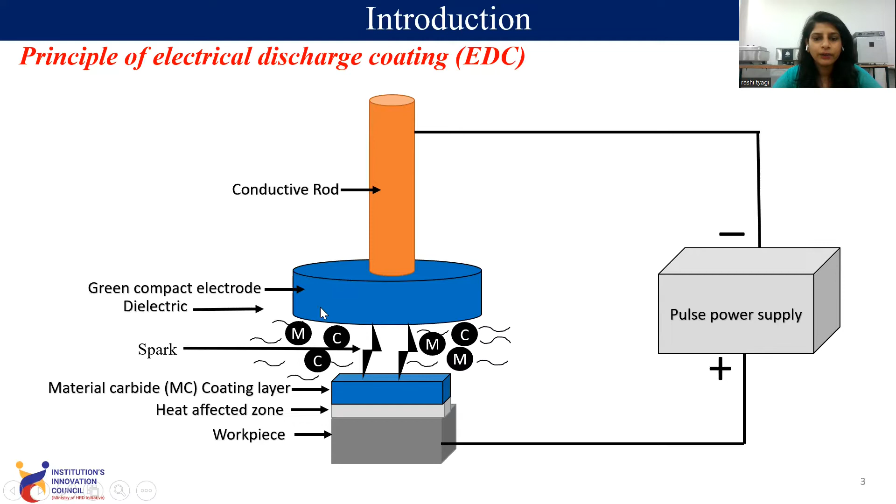This is our process, which we will further discuss in terms of advantages, disadvantages, and how it helps improve the surface characteristics of any workpiece or substrate. EDC is an effective process because just by utilizing powders, you can deposit material, so any area over the workpiece surface can be coated easily, including small surfaces.

Multiple materials, including composite coatings, can be produced in one go, meaning you can use many materials and by making a composite, deposit it on the workpiece surface. Machining and coating can be done simultaneously - if using hard material, you can perform machining and coating together to improve surface characteristics during machining.

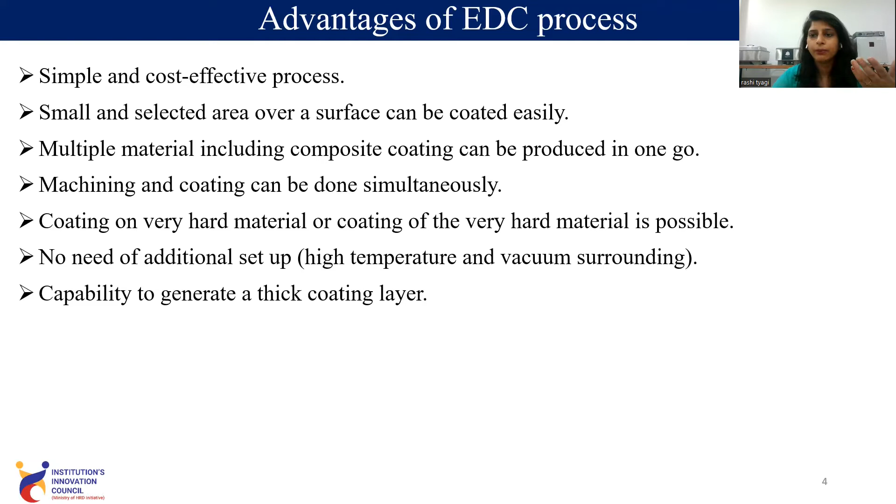Coating of very hard material is possible, meaning any hard material can be used in this setup. Basically, no high temperature vacuum surrounding is required as it is in other processes such as laser cladding. There is also the capability to generate a thick coating layer, up to 2 mm thickness, so even if you want to repair a component, you can deposit a thick coating onto the surface.

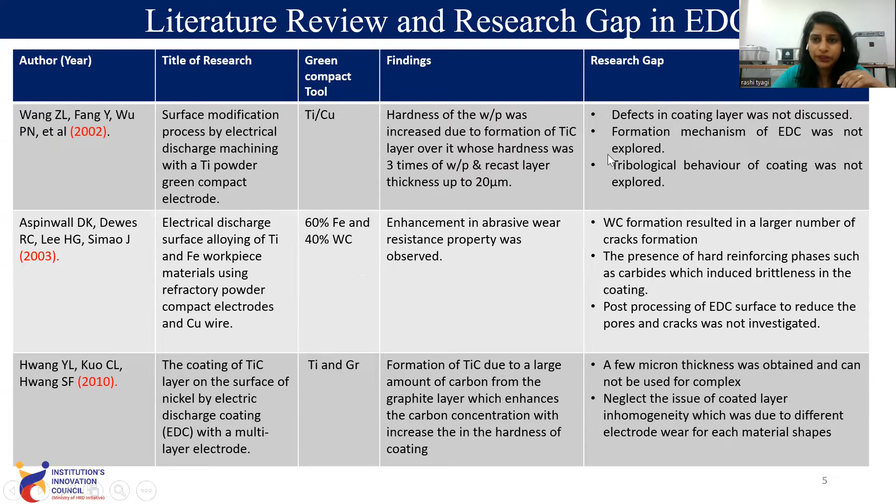Regarding the gap in EDC research: many studies were done on the EDC process from around 2002-2003 through 2010. In all this research, it is found that they used titanium, copper, iron, tungsten carbide, and graphite - depositing hard coatings, but there is no soft coating done by this process. They improved wear resistance and tribological behavior of the workpiece surface using different hard tools.

In this, titanium carbonitride, silicon carbide, copper, and stellite can be used. These are the findings of the research gap analysis, in which we found that cracks and pore formation was there. Also, some of the research does not discuss the wear and friction behavior of the coating.

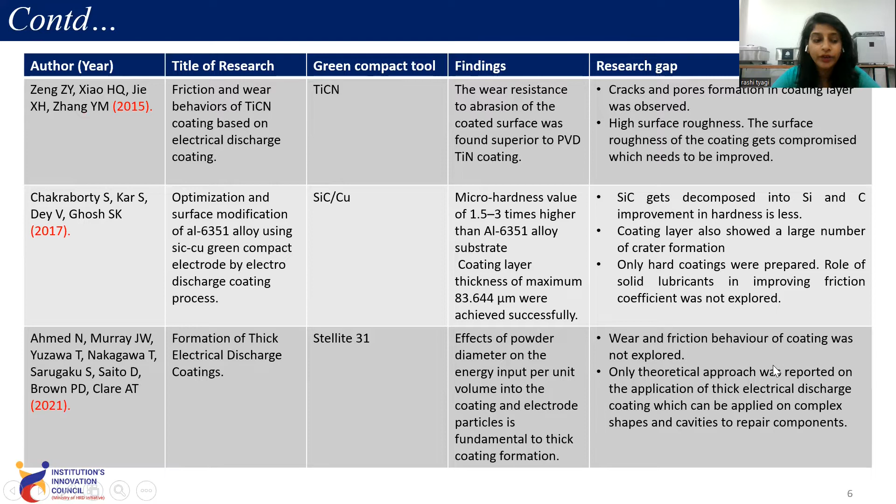So what are our objectives? By identifying the research gap, we found there is no use of soft powder, as I've already discussed. So in this process, we are using solid lubricant coating - solid lubricants WS2, hBN, MoS2, that is molybdenum disulfide, tungsten disulfide, and hexagonal boron nitride. We are using these powders to improve the characteristics of the mild steel surface through the electrical discharge coating process.

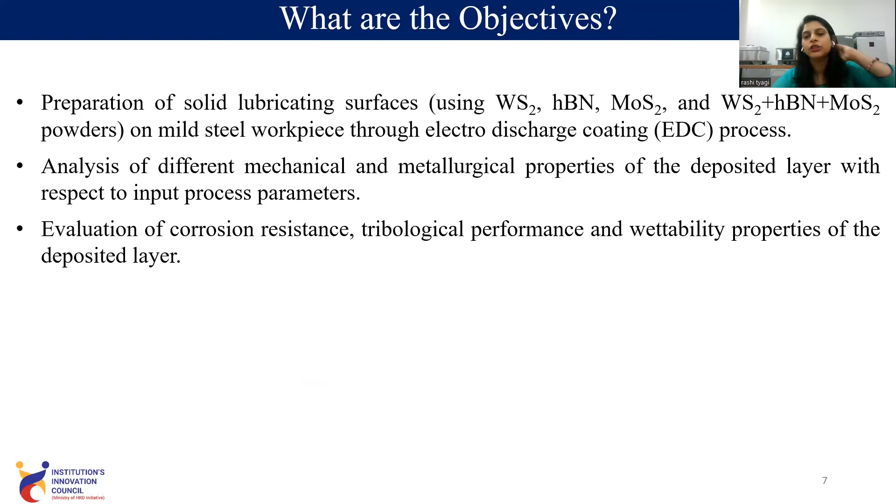We will analyze mechanical and metallurgical properties of the coating, examining different characteristics of the deposit layer with respect to input parameters - meaning the EDM parameters that we are changing. We will also evaluate corrosion resistance, tribological performance, and wettability of the deposit layer, discussing how the EDC process improves these properties.

Lubrication, basically these are the WS2, MoS2, and HBN lubricants, and how they work. They have a lamellar structure, meaning these are layers in laminar form. They have low shear resistance between these layers, so that they can slide over each other.

If they slide over each other, they provide low coefficient of friction against other surfaces, as you can see there is a large area in this figure. So there will be low shear stress, because shear stress is equal to force per unit area. So if area is large, because these lamellae align themselves in the direction of motion, area becomes large, then shear stress becomes small.

So there is low shear stress, so that they can provide low friction coefficient. These are the structures of WS2, MoS2, HBN that we have shown, that they have the lamellar, hexagonal structure. This structure helps in improving the tribological properties, or you can say coefficient of friction or wear properties.

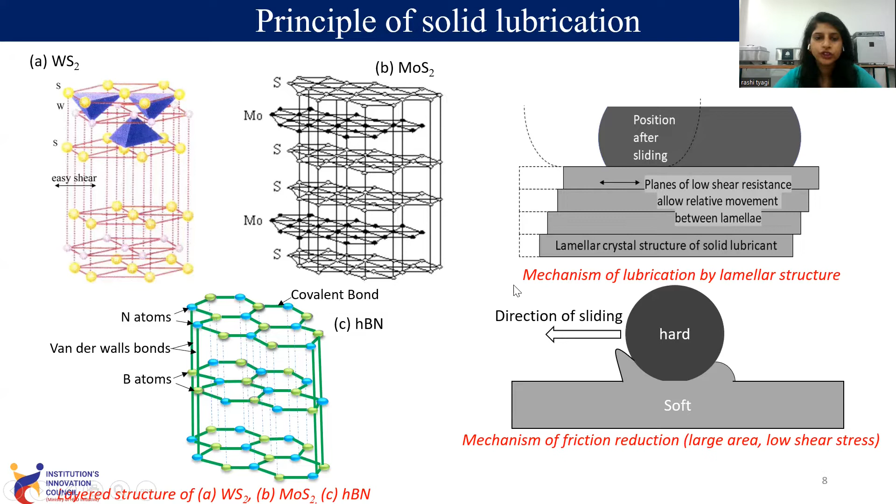Initially we have fabricated the green compact tool, then we have performed the electrical discharge coating, then we have analyzed the quality of coating. Basically, the tool is fabricated by using different powders.

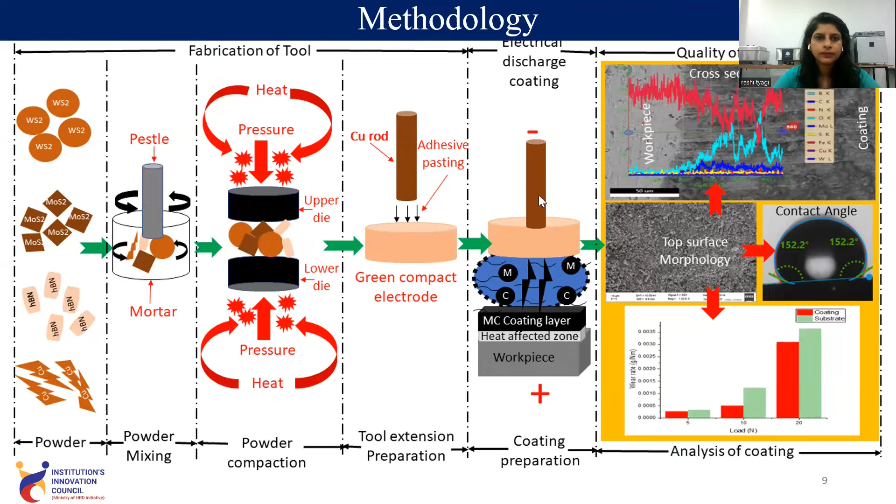Of the green compact tool, how we have prepared it. These are some constant input parameters that we are using, that is solid lubricant, powder material constant. We are using WS2, MoS2, HBN, copper powder. This is the average powder particle size that we are using.

This is the sintering temperature applied in the hot mounting press. Basically, these are the hot mounting press parameters in which we are making the green compact tool. This is the pressure, 200 kg per centimeter square. Heating time 10 minutes, cooling time 5 minutes. These are the variable input parameters, that is we are changing the powder mixing ratio in different ratios.

First of all, we are using all together copper, WS2, MoS2, HBN, and in other green compacts we are using different combinations. It means we are taking copper-WS2, copper-MoS2, copper-HBN in these mixing ratios. By using these mixing ratios, we have prepared the green compact tool.

Basically, this is a solid lubricant. This is the HBN powder that we are using. This is the copper powder, an example of a solid lubricant. This is the binder. So when we are mixing it, we are making the green compact tool of this size, and then we are making the tool electrode extension that we have already discussed in methodology.

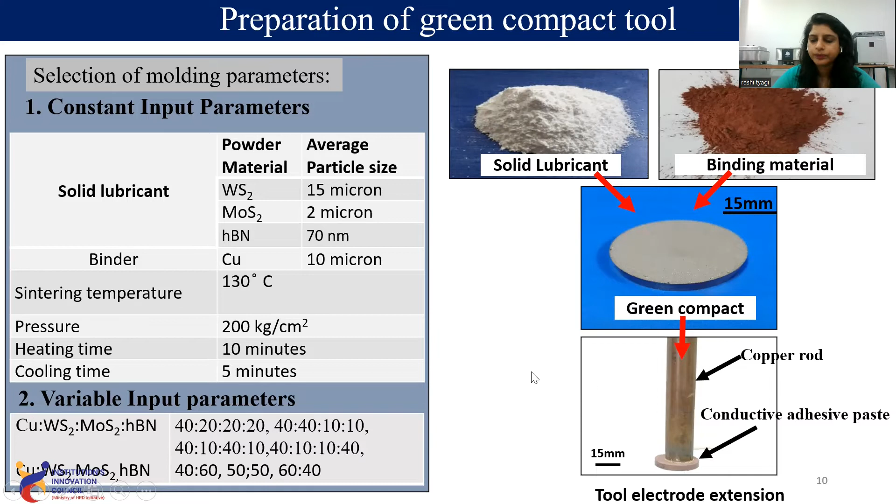The experimentation is performed as we have discussed in EDM. These are the constant input parameters that we are using. The workpiece material is mild steel. These are the dimensions, machining time 4 minutes, polarity negative or positive. Basically these parameters, 4 minutes, 29 microseconds.

This is pulse on time, the time for which current is allowed to flow through the electrode, which is 29 microseconds, and gap voltage is 40 volts, and peak current is varied from 4 ampere to 10 ampere. Duty factor is 30 to 90%. These parameters are decided by performing trial experiments that we have conducted.

The arrangement of the setup that we are using: the green compact tool is held in this tool holder, and this is the magnetic base which is attached to the clamping vise. The clamping vise is where we have attached the workpiece surface. So this is the setup that we are utilizing.

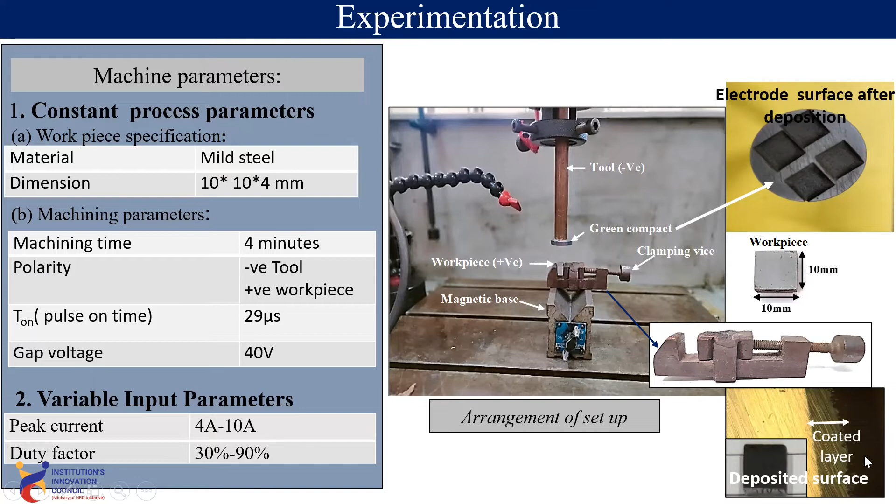After the coating, it is observed that there are holes in the electrode surface after deposition, and there is a deposited layer that we have obtained.

So the electrode surface after experiment, we have decided the trial experiment we have performed. Below 4 ampere current, it is observed that there is no deposition. It means the tool material doesn't get melted and doesn't get deposited on the workpiece surface. So below 4 ampere, we have not performed the experiment.

So this is the copper HBN ratio. Above 10 ampere current, the tool gets melted. Then you can see at high coating time that we are using 4 minutes above high coating time. So we did not perform the electrical discharge coating because the tool gets eroded totally.

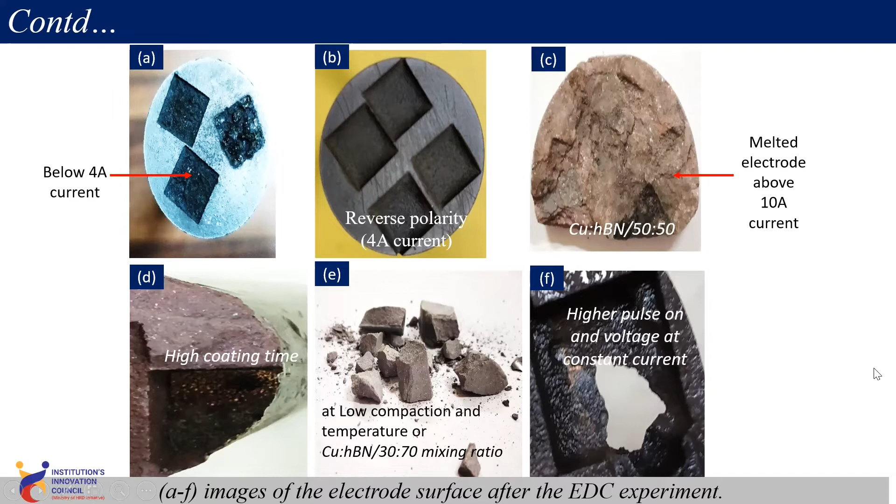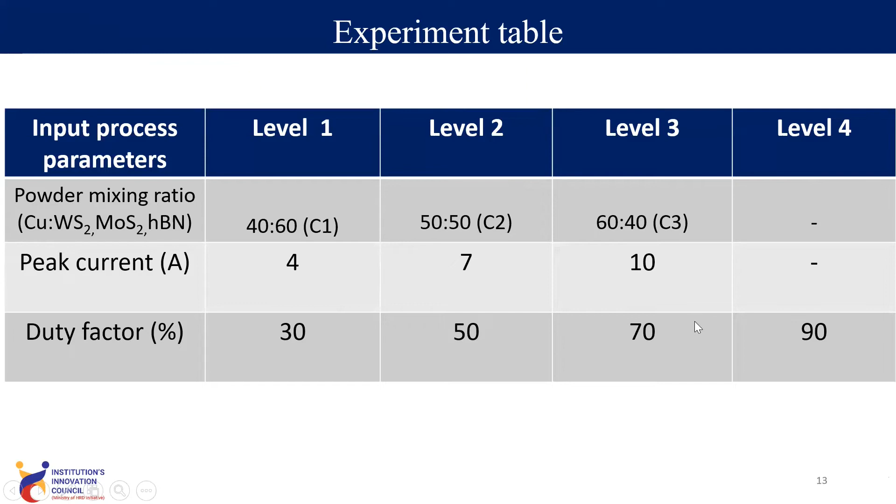Experimental table in which these are the powder mixing ratios that are varied, peak current 4 ampere to 10 ampere, duty factor 30%, 50%, 70%, and 90%.

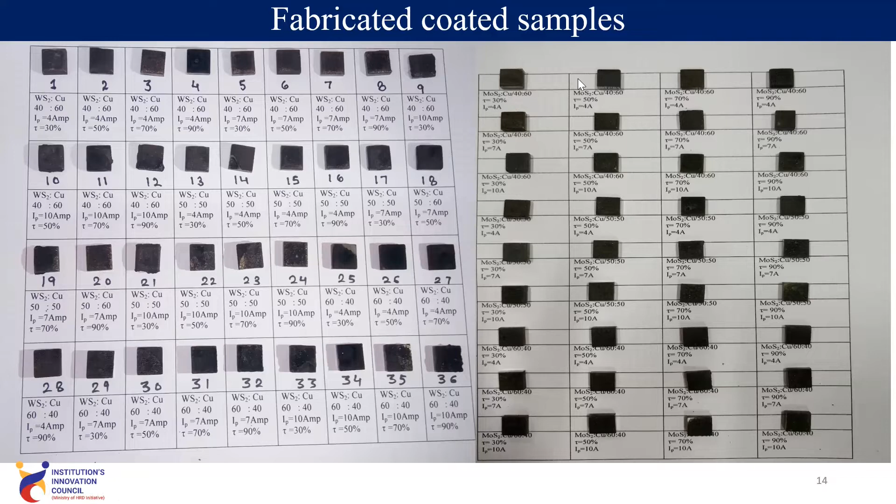These are the fabricated coated sample images. As you can see, these are 36 experiments performed using copper WS2 tool and copper MoS2 tool. 36 experiments that we have performed, as I have shown, these are the surfaces after the coating.

Result and discussion. Initially, we will discuss the investigation on coated surface characteristics. Here is the cross-section morphology of coating at different peak current.

As you can see, this is for MoS2 plus copper coating. This is for WS2 plus copper coating. And this is for HBN plus copper coating. So we have observed the result at different peak current.

Similarly, in the MoS2 and HBN coating. Why? Because when we increase current, a large amount of heat goes into the tool surface, and more of the tool gets melted, and more metal gets deposited over the workpiece surface. So we have higher thickness at high current.

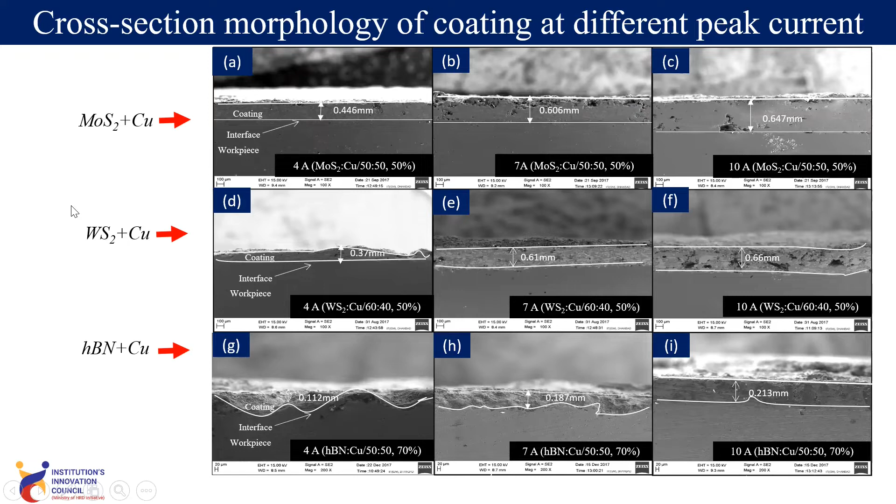This is the surface morphology of coating at different mixing ratios. It is observed that when we change the mixing ratio, there is a change in morphology. It is observed that when we use a high amount of MoS2 and low amount of copper, basically copper works as a binder.

Copper works as a binder. So if we change the percentage of copper, or use a low amount of copper, there is an issue since MoS2 is basically an insulating material. So if we use a low amount of copper and high amount of MoS2, the electrode becomes insulating, less conductive. So it becomes difficult to deposit metal on the workpiece surface, and non-uniform deposition was observed.

Although when we use MoS2 copper 50 to 50, a good amount of deposition can be observed, although some pores are there. Similarly, we can observe WS2 copper coating, in which we observe very little pores at 60 to 40 coating. We observe a large amount of electrode erosion at this mixing ratio, and large amount of deposition takes place at this mixing ratio.

So these are for HBN plus copper coating, in which at HBN 50 to 50 we observe a good surface.

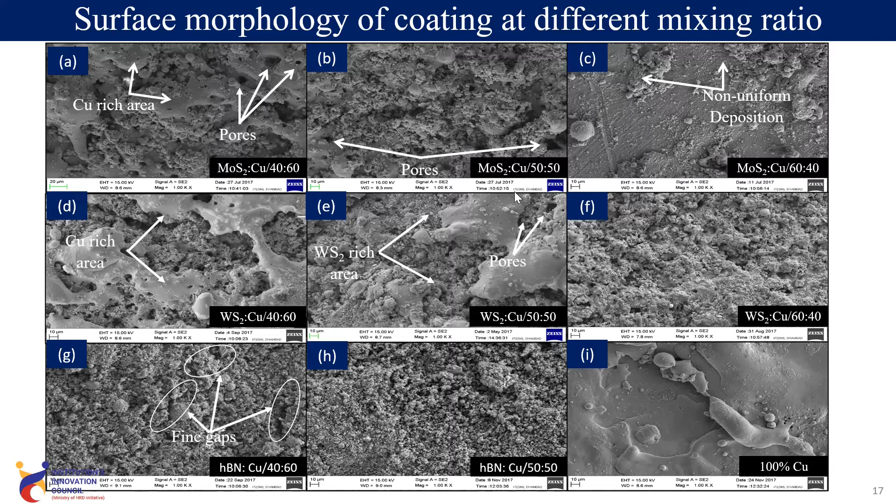Morphology of the solid lubricant coating at different duty factor. Basically, duty factor determines the efficiency of coating.

We observe that when increasing the duty factor up to 50% for MoS2 copper coating, a good surface is obtained. Although when increasing the duty factor to 90%, only arcing is obtained.

This is because duty factor is the pulse on time divided by total cycle time. So when we increase the pulse on time, a large amount of current goes through the electrode.

More material gets eroded from the tool surface, but it accumulates in large amount in the spark gap, so it does not flow with the dielectric.

So arcing takes place, meaning the same spark is generated at the same location, because there is a large amount of material between the spark gap.

So it is observed that at 50% duty factor, a good surface is obtained. When increasing the duty factor from 70% to 90%, mainly arcing is observed, so void formation and big pores and some defects are seen. Similar results are obtained for WS2 copper coating, and for hBN copper coating at 70% we obtained a good surface.

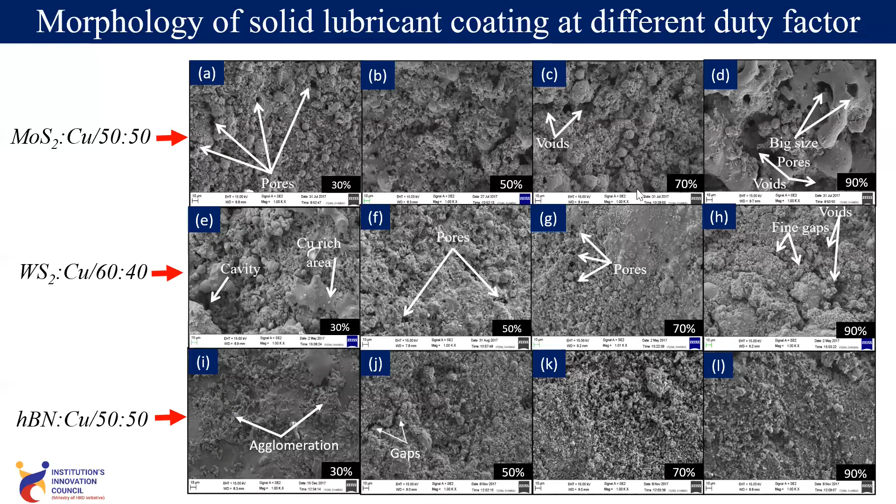The micro hardness was measured using the Vickers micro hardness machine. There is the micro hardness that we have obtained for different coatings. You can see there is very low hardness obtained using the solid lubricant powder.

For the parent material, which was mild steel, we observed hardness was 180 HV at 0.2 kg load. But for solid lubricant coatings, you can observe lower hardness below 180, such as 80, 60, 80, 65, 67. These different hardness values we obtained are due to the solid lubricant powder.

Basically, the solid lubricant is a soft powder that results in low hardness. These are the soft lubricants, MoS2, HBN, that we are using. So hardness becomes low. This also proves that there is a solid lubricant deposition on the workpiece surface, which can improve the tribological properties. These are the micro hardness values at different duty factors.

The micro hardness at different duty factors is shown in different colors. At different duty factors, you observe there is low hardness obtained by increasing the duty factor from 30% to 50%. A similar result is observed for copper WS2 coating and copper HBN coating. By increasing the duty factor above 50%, to 70% and 90%, the hardness changes.

Why? Because at 50% duty factor, as we have already discussed, there is a large amount of deposition. So the hardness becomes low at 50% duty factor.

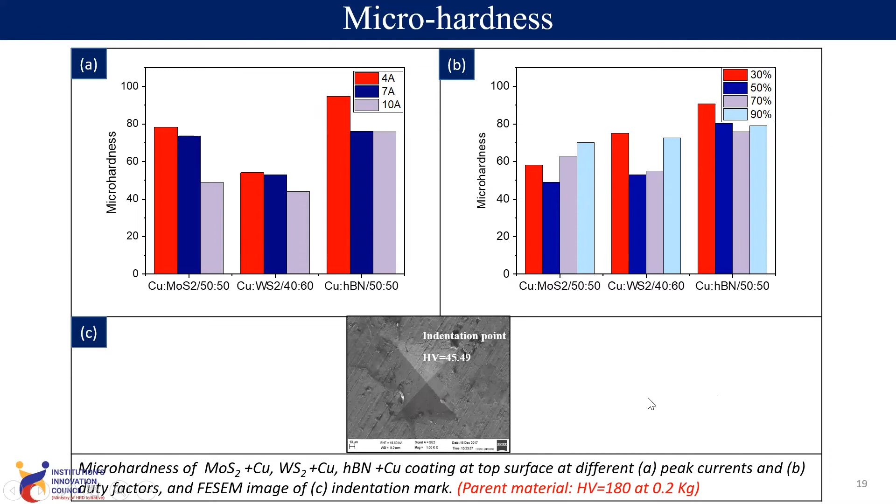Let's discuss the chemical and corrosion resistance analysis we performed. We performed EPMA mapping, which is used to denote the spatial distribution of the coating elements, that is Mo, copper, sulfur. These images E, F, G are for WS2 copper.

Images I, J, K, L are for hBN copper. In these images, we observed a uniform deposition of the metal on the workpiece surface.

The dark orange part shows Mo, copper, and sulfur. Similarly, dark orange parts show tungsten, copper, sulfur, and boron, copper, and nitrogen. So we can say there is a uniform deposition of the tool material on the workpiece surface.

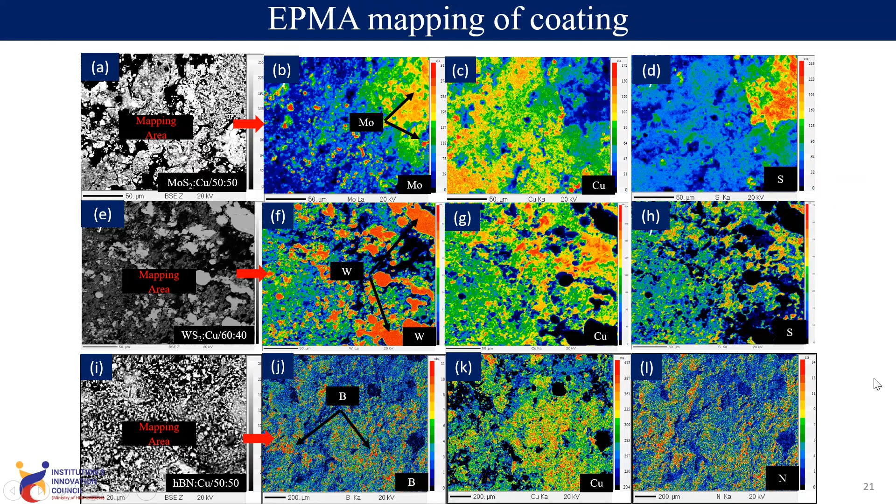Then we have the chemical state analysis. This shows that there is a total amount of deposition of MoS2 particles, meaning the MoS2 element does not break into molybdenum oxide or sulfur oxide.

This can be proved by chemical state analysis, because in laser cladding process or other processes, it is observed that Mo and sulfur get disintegrated and form oxides and other compounds.

But in the EDC process, MoS2, HBN, and WS2 do not disintegrate because we are using low pressure, so they do not disintegrate, but the total amount gets deposited on the workpiece surface. This can be proved by these images obtained from XPS analysis.

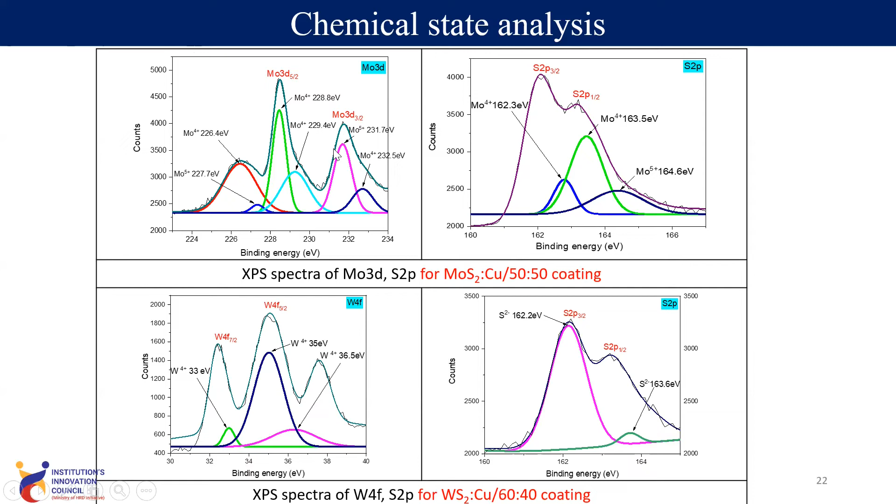By this and previous studies, we have proved that there is total deposition of MoS2, WS2, and HBN.

Corrosion rate measurement was performed. This is the corrosion rate formula that we used to perform the corrosion resistance analysis.

This is the setup we used: a spindle attached to the coated sample, then NaCl solution, with 1 centimeter square area, performed over 140 hours, and density calculated using the Archimedes principle.

The stand we are using is a spindle. First, we conducted the corrosion resistance analysis at stagnant solution condition, then using a motor, analysis was performed at flowing water condition.

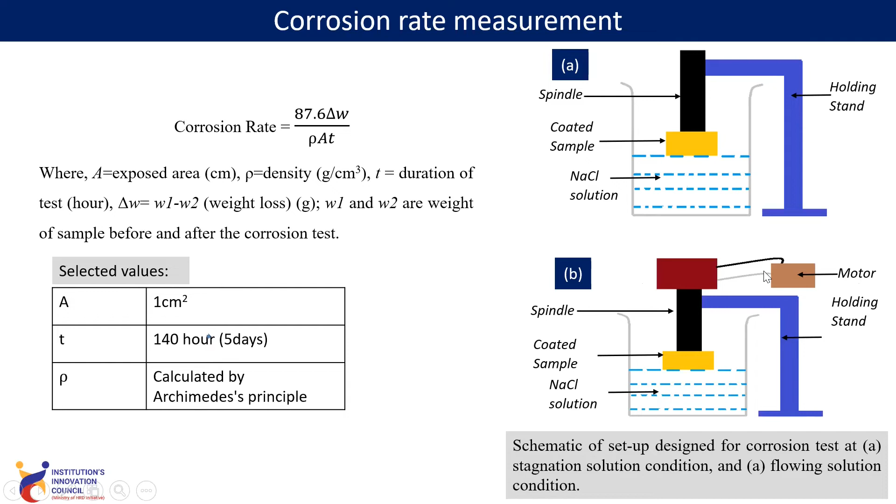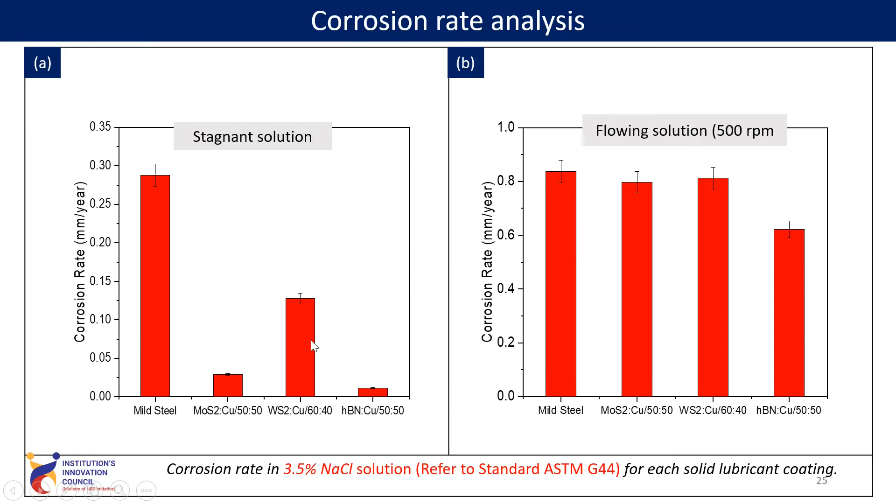We obtained a stagnant flowing water solution in different coatings. The minimum corrosion rate is observed at HBN copper coating, at stagnant and flowing conditions both. All these coatings showed less corrosion as compared to mild steel.

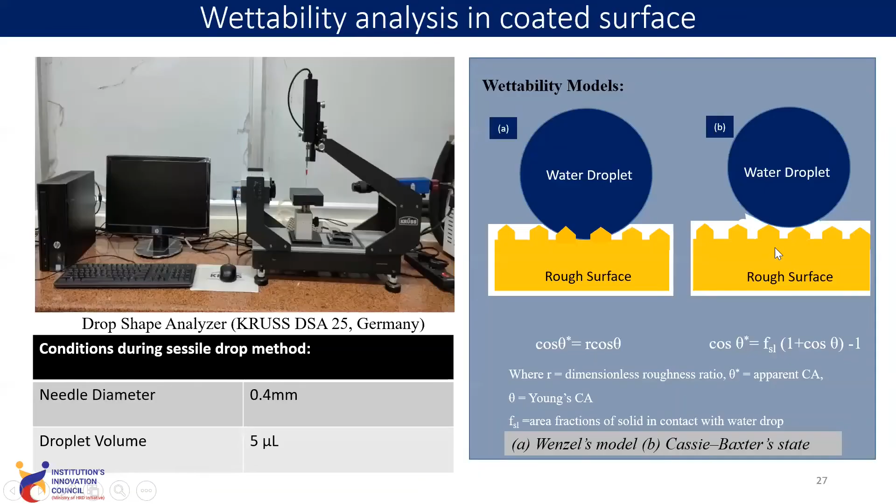This is according to the Cassie-Baxter model, which states that if there is a large amount of porosity, the water droplet will rest at the top of the surface and wet it. If it wets the surface, it will go through the rough surface. But here there is a nodular protrusion on the rough surface, and this protrusion results in repelling the water, giving a large contact angle.

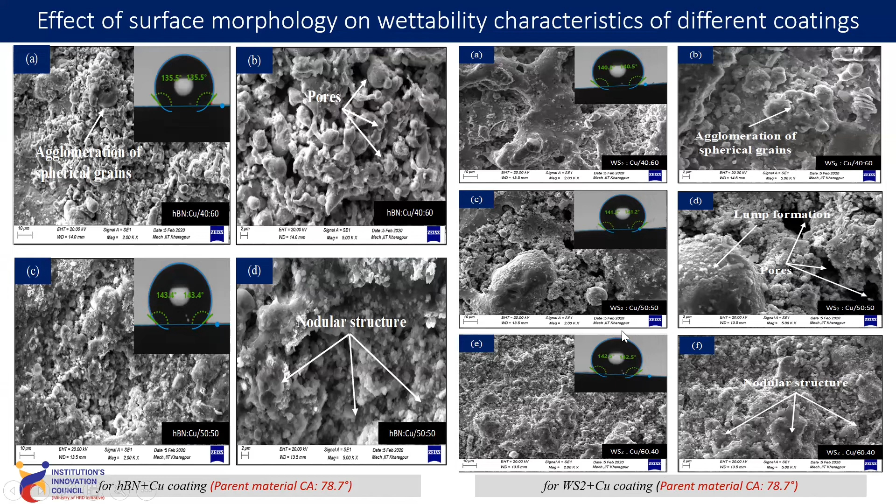The parent material, mild steel, shows a contact angle of 78.7 degrees. But for the MoS2 copper coating, we obtained a large contact angle, with similar results observed. Although there is a large amount of lump formation and big pore formation, this results in repelling water and a maximum contact angle of 165.6 degrees.

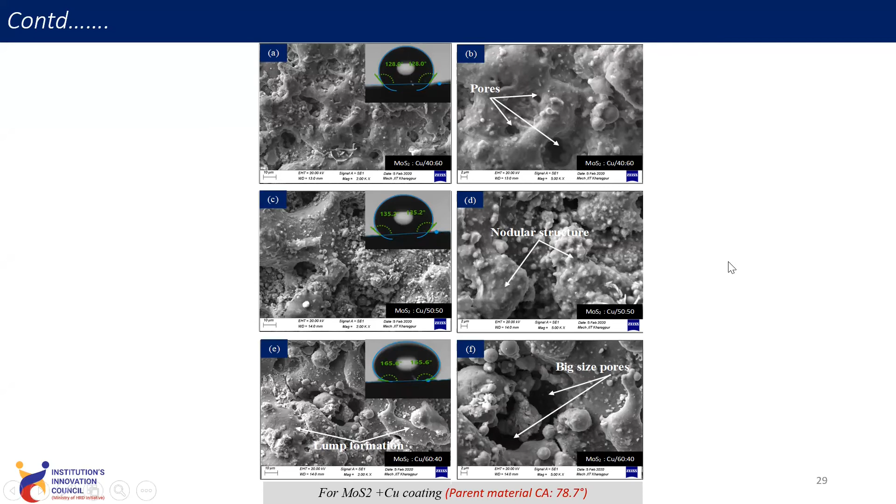Energy calculation: surface free energy defines the excess energy that a surface has as compared to the bulk. Surface free energy determines biomedical properties, self-cleaning property, and wettability of tribological properties. If the liquid is repelled by the surface, then surface free energy will be low, meaning it will provide better cleaning in biomedical components or wettability for tribological properties.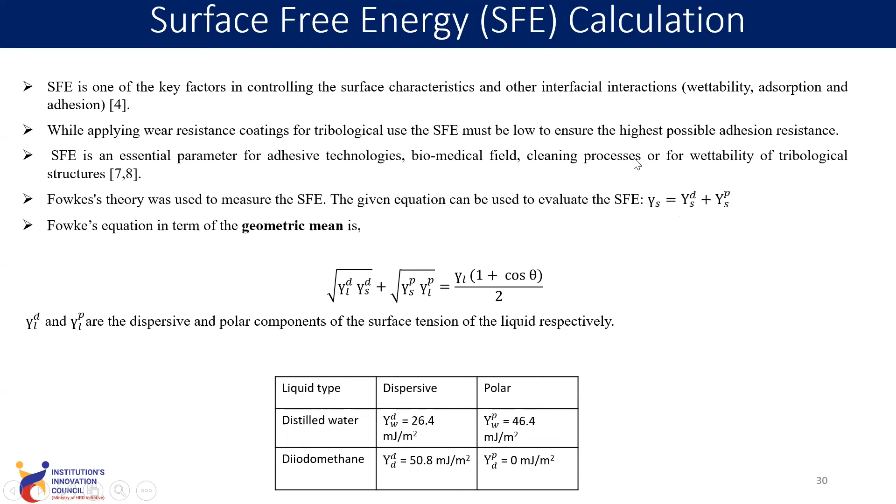Taking the total surface energy, it is observed that among the coatings, the minimum energy is obtained for the WS2 copper coating at the 60:40 mixing ratio, which corresponds to coating A3 with the 60:40 mixing ratio for WS2 copper coating.

This shows the minimum amount of surface free energy, meaning it can show good self-cleaning and tribological properties since it has the lowest surface free energy among all coatings. We also observed total surface free energy over time, where as time increases, surface free energy increases because the surface loses its water-repelling property, and the water droplet will then absorb.

This is the surface energy for the parent material. All these coated surfaces have low surface free energy, below 43.92, as compared to the parent material.

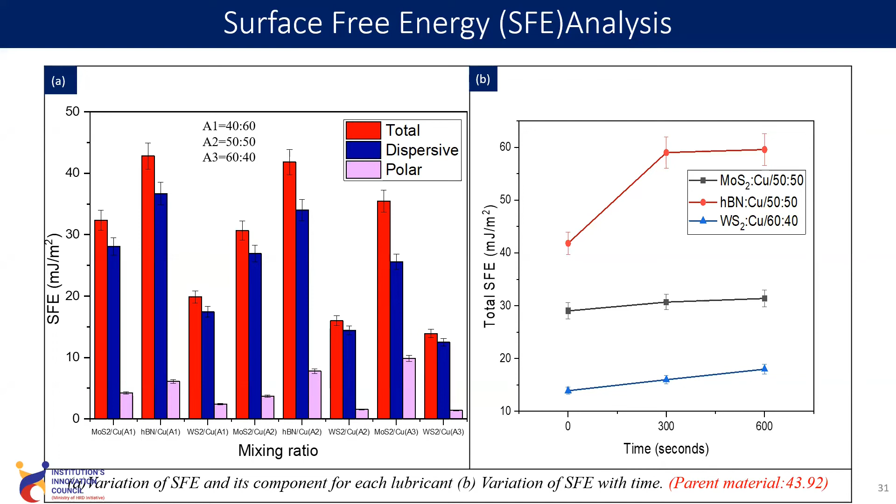Wear and friction behavior of the coating, along with the parameters we are using. This is the setup that we are using, the pin on disc test setup.

The formula for specific wear rate involves calculating the weight loss or mass loss, the sliding distance of the wear track, and the load, from which we obtain the wear resistance.

This is the prepared pin, and this is the coated sample attached to the pin. This is the chemical configuration of the EN31 steel disc, which serves as the counter disc as shown in the figure. This is the material component, the EN31 steel disc, along with the coated sample that we are using.

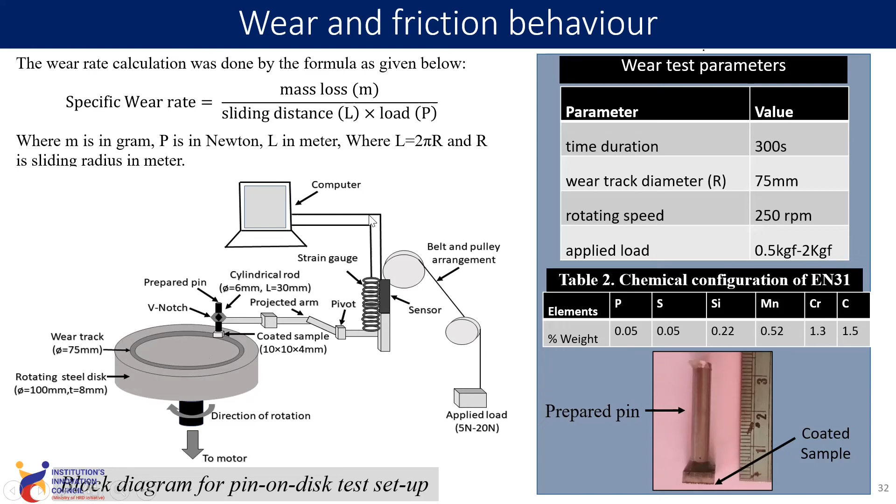By capturing the data on the computer, we obtained the coefficient of friction and wear in different coatings. We observe that all the samples showed a low specific wear rate and low coefficient of friction compared to mild steel. This is the coefficient of friction for the mild steel surface; all other samples showed lower coefficient of friction than mild steel. We have also shown that these all have a low amount of surface free energy, so they show good tribological properties.

Similarly, for WS2 copper coating, we observe a minimum wear rate, the lowest among all coatings, because this coating also shows low surface energy. So we have established the relation between surface energy and wear rate. This figure shows that the mild steel surface has larger surface energy, while all the coated surfaces have low energy.

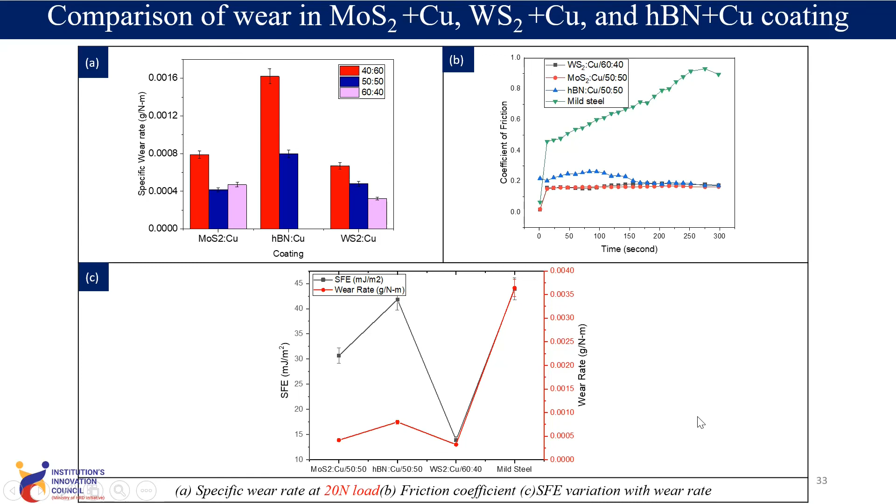This is the comparison of wear mechanism. As you can see, this is the mild steel surface, this is the MOS2 copper surface, the WS2 copper surface, and the HBN copper coating. In this, it is observed that abrasive grooves are formed, and for the minimum wear case, minimal abrasive sliding direction marks can be seen. This surface showed the highest wear resistance.

This is the surface captured after the tribological test. We can see deep grooves in HBN copper coating, and also deep grooves in the sliding direction for MoS2 copper coating, but a low amount of deep grooves for WS2 copper coating. This also proves that WS2 copper coating has the lowest wear rate.

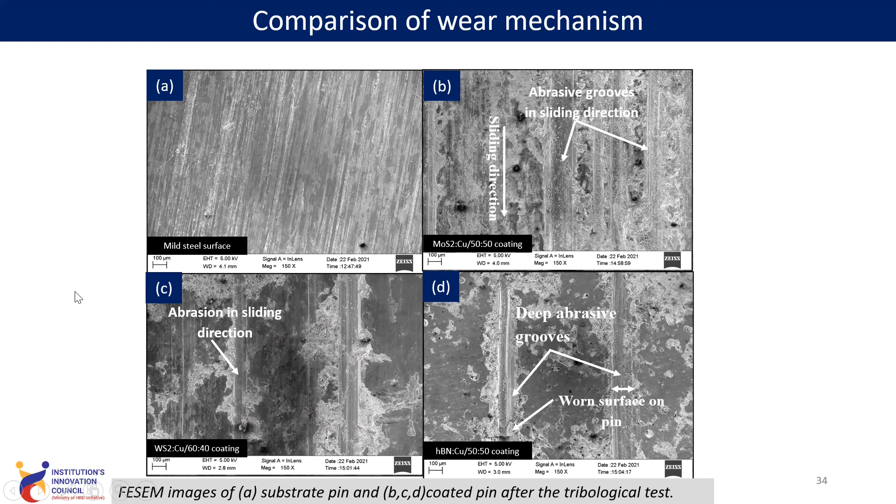Conclusion: pure solid lubricant coating was not possible as the powders are non-conductive and very dry. So copper was mixed as a binder. Basically, solid lubricant coating alone was not possible because these solid lubricant powders are non-conductive, so copper was mixed as a binder to make the green compact tool conductive.

The morphology of the coating can be varied in the EDC process with proper control of the input process parameters. As we have seen, at large peak current, large coating thickness was obtained. So we can control the coating characteristics by controlling the process parameters, which also determines the porosity in the coating, because large tool erosion results in large deposition, and large tool erosion is possible at high current.

Maximum roughness was obtained with MoS2 copper coating, as we have seen a large amount of nodular protrusion in MoS2 copper coating, resulting in a large contact angle of 165 degrees.

All the coatings showed a low degree of wear compared to the base material, but as we have already observed, wear rate was lowest in WS2 copper coating, which also showed the lowest surface energy at this mixing ratio.

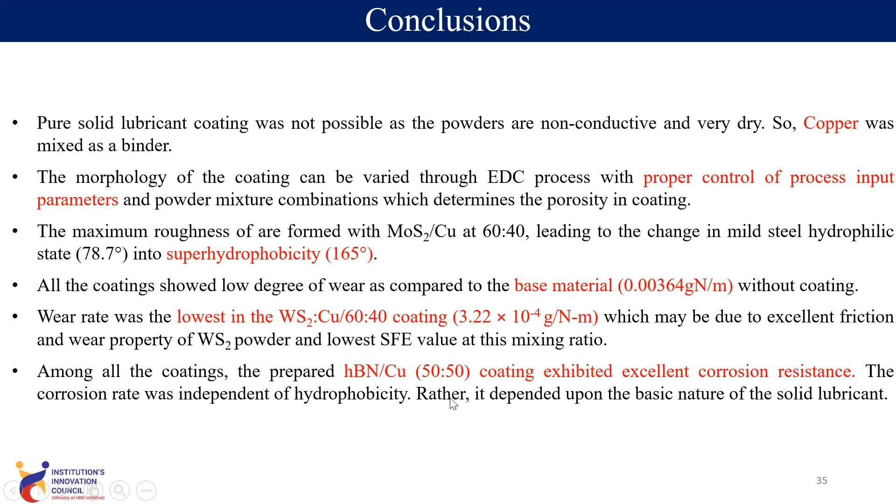Among all the prepared coatings, the HBN copper coating has shown excellent corrosion resistance because it has a proper corrosion resistant property. HBN's corrosion resistant property results in greater corrosion resistance compared to WS2 copper and MoS2 copper materials, because corrosion resistance depends on the basic nature of the solid lubricant.

The future scope of the work includes post-processing of the EDC layer to reduce surface roughness. Basically, the EDC process produces large surface roughness which cannot be used in some industrial components, so post-processing is required. This can be done by performing the EDC process again on the obtained surface.

Then, application of EDC over complex shapes. Basically, as we can change the shape of the green compact tool, if we use a complex shape tool, it is possible to coat complex shaped workpieces.

And study of the EDC process with a green compact tool through development of a numerical model. Basically, there is no numerical model developed yet to observe the heat transfer effect and current effect. These things can be done in the future.

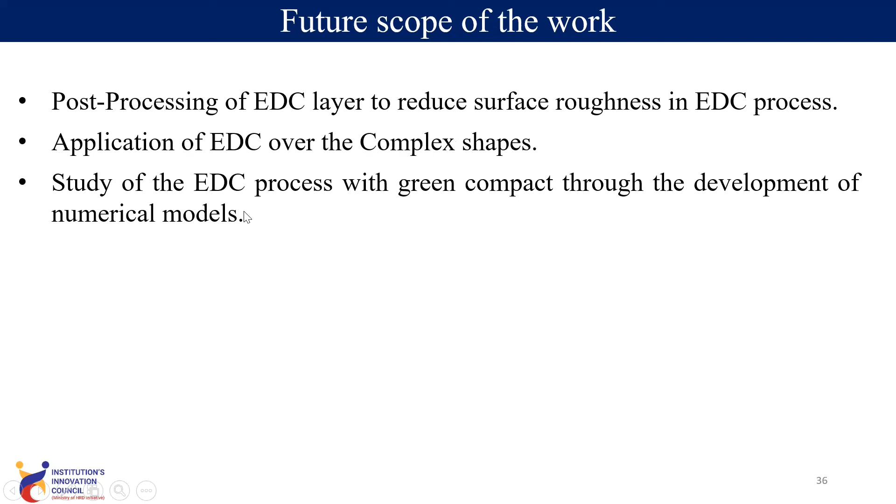So the future scope is: first, reduction of surface roughness; second, complex coating over complex shaped workpieces by making complex shape tools; and also developing numerical models to obtain optimization of the process that we have utilized.